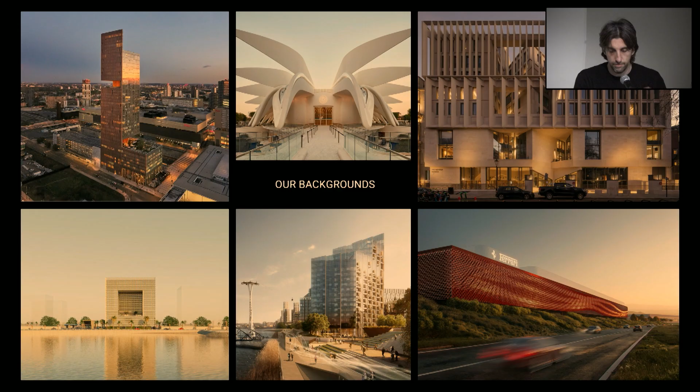We come from different professional paths. Myself, I started my career as an engineer, then transitioned into architecture after moving to London. Since then I've been working as an architect, first at SOM and then at A-Fact. On the other side, Andrea and Giovanni started as architects, moved into engineering for a while, and then went back to architecture.

So we have a diverse background, and this gave us the opportunity to be exposed to projects in different ways, from the engineering perspective, the sustainability perspective, but also from the architectural perspective. So we like to work in a hybrid space in between the disciplines.

Our philosophy is based on this book, Factfulness. We came together after reading this with a strong idea of bringing our past together into one approach. It's a very famous book, but it explores common misconceptions about global trends and uses data-driven insight to challenge pessimistic views about the world. At the same time, it offers practical ways to understand, and by using a fact-based perspective on progress, inequality, and human future, gives possible solutions.

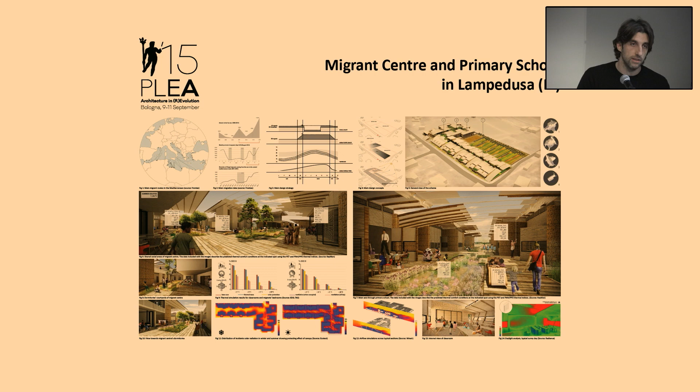Our first A-Fact project was born out of our dissertation. In 2015, we focused on addressing a stringent challenge of our day: migration, and how to deal with migrants coming from sub-Saharan Africa into Europe, into the south of Europe. This was the first project where we gave a solution by cross-referencing data on the seasonality of migration and climate data, putting them together to develop a hybrid architectural solution that could work as a migrant center during some periods and as a school during others.

So it was sustainable in the way it was interpreting and understanding the climate.

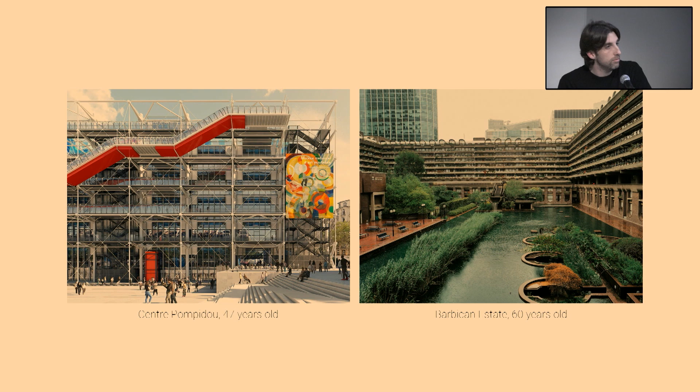But also, when we look at sustainability in a different way, there are some buildings that maybe don't reflect directly with the climate, but they manage to engage a complex dialogue deeply rooted in the reality of their context. We believe that architecture is rarely impactful when it's just a dogmatic idea, but it always emerges from a dynamic system of tension between practical needs, context, history, material, and human aspiration.

We also think that reality should not be seen as a limitation, but rather as a rich source of inspiration. And architecture, like we see on the right, should not impose itself, but should acknowledge its vulnerability. So that vulnerability could be an added value. You'll see in the next project that I'll show that we're trying also to get to that point.

So after understanding the building and seeing what the building can tell us, what the surrounding can tell back - this presentation focuses mainly on some aspects that I found key when translating the environmental design methodology into the profession, because the profession is not affected only by the environment, but by many other forces.

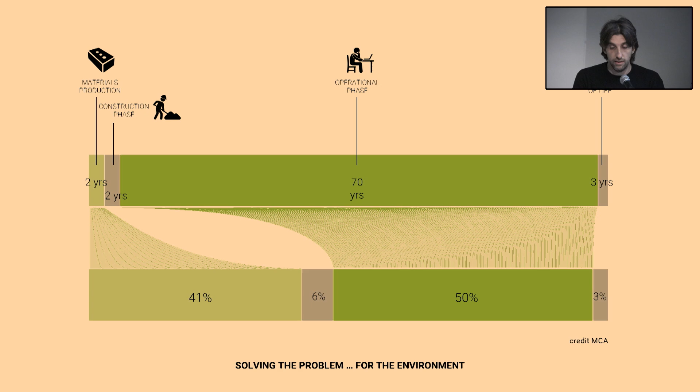But also we need to solve a problem for the environment, and we are very aware that just the construction phase of the building, the first 2 years, if we think about a 100-year building life, can affect 41% of the emission of that building. And the next 70 years, the operational carbon is going to take 50% of that share. So these things are starting to be relevant today, and I think we need to acknowledge all aspects of it.

And finally, solving the problem for the future means looking not only at what's going on today, but what would be the challenge of tomorrow. Things like pollution will be solved through electrification of the different systems, but biodiversity, water, waste and energy will be the most pressing challenges.

So our building should possess all those qualities together, and mimicking a TV program, we call it the A factor - which means the ability of the building to possess and harmonize all these aspects together according to the different cases.

After this introduction, I'm going to show three projects that we have been developing recently, which will soon be on site. These projects talk about three challenges for the architect today: building light, building community, and building ecosystems, which we think are very pressing challenges for contemporary architecture.

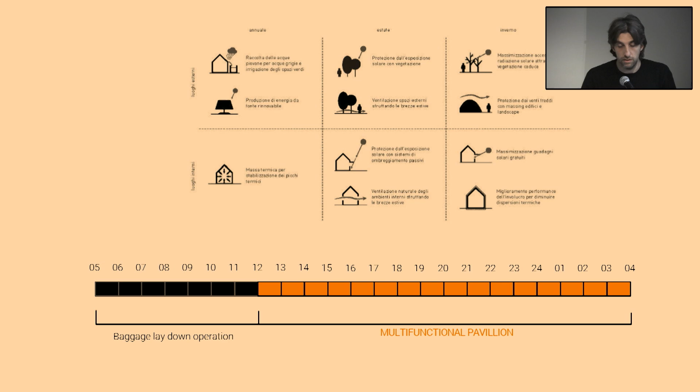Also thinking about Palermo's climate, which is very mild and Mediterranean, with relatively mild temperatures in summer and very strong solar radiation, our first idea was to use the building all the time. So we proposed to the client to use it as a multifunctional space for events that could actually bring revenue for them, and at the same time to build something that was really light, a roof that could protect from the sun.

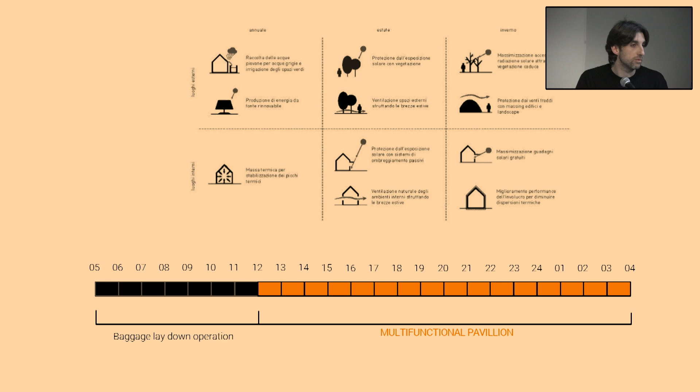Starting from the original building, which still functions, and the extension as a temporary structure in front of it, we started from the prescribed dimension.

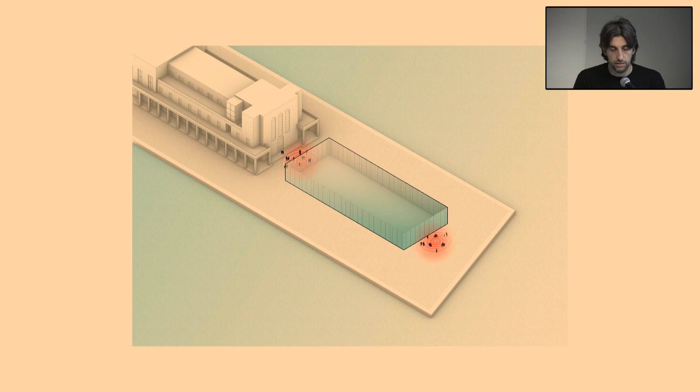We built the notional volume that was needed by the Port Authority, and then we created a roof that was based also on the movement of passengers entering the building and then going out from the site.

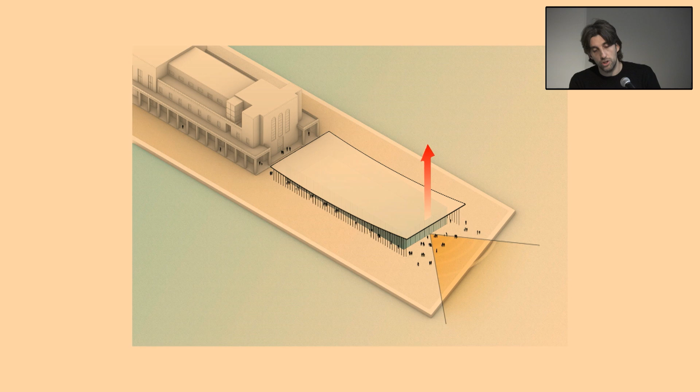But then we thought that the building could have an interesting way of welcoming the cruisers coming to Palermo, since this was the first thing they saw once they arrived. So our challenge was to create something a little bit more extraordinary out of a really standardized element.

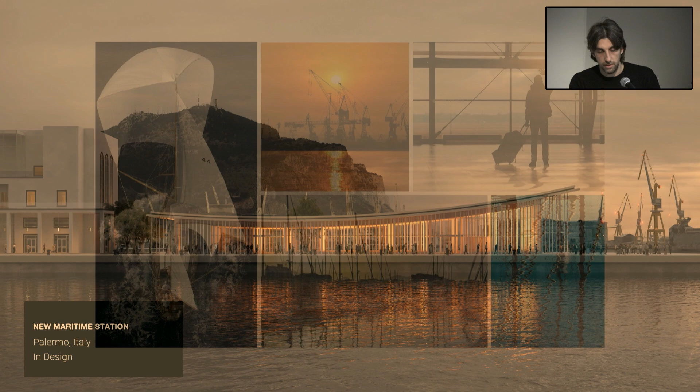The building also had to be very much inspired by the surrounding port, with its cranes, the movement of the wind, the reflection of the water. So we took all these elements, brought together this data, and ended up with this pavilion that's all about giving value to a temporary structure - very simple pieces put together, but also embracing the nature of the building as a temporary, ephemeral structure in so many ways, something that could be used by the community.

We analyzed the overhang to find the optimum balance between the economic efficiency of the cantilever and the solar radiation values dropping onto our glazed surface. We wanted the building to be glazed.

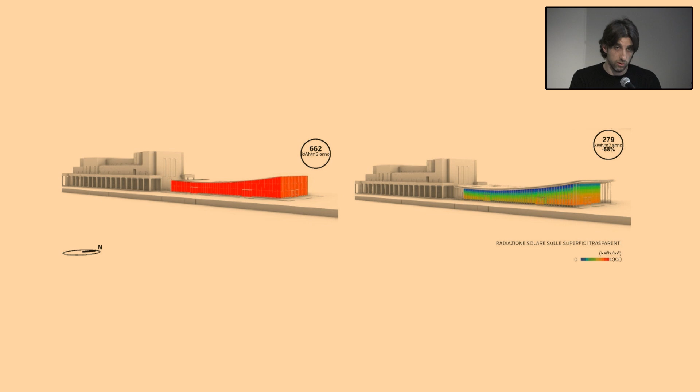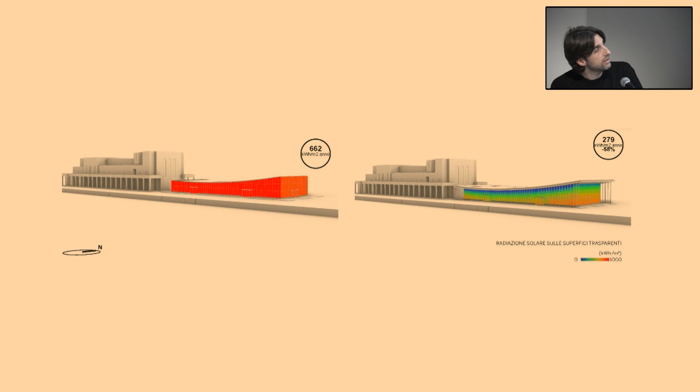The client was pretty much forcing that as well. But we also wanted to create a building that, with the structure, the architecture, and the form, could act as both an environmental design, a structural device, and an architectural device.

So we wrapped the building up with a series of very thin columns, which worked also as a shading device on the east and west sides, and a very deep roof acting to protect the space below. With natural ventilation, the building could be free running.

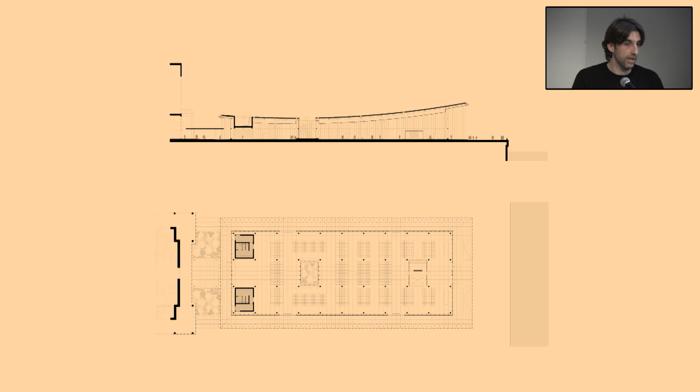However, because it was a technical space, we had to provide mechanical ventilation. The plan of the building also resembles that of a temple, with a simple, modular, repetitive structure.

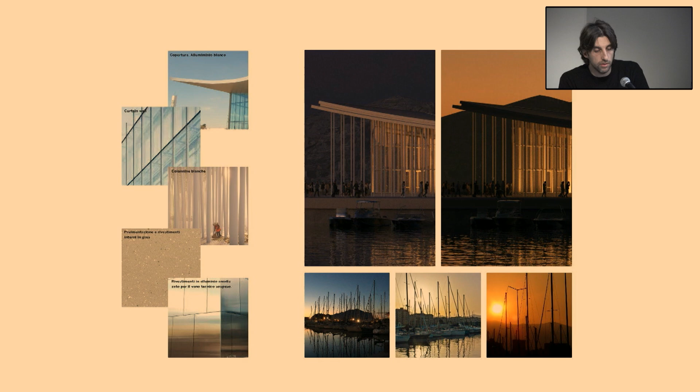We worked a lot with materiality to use material that could reflect and emulate the environment of the harbor, so the building could change and reflect what was going on around it.

This is another image we created recently that brings together this idea of the frame of the background, this object as an abstract presence in the port, but also everything very, I would say, temporary - this idea of the ephemeral emerged a lot in the project and became also a kind of strength of it.

All the elements were easily assembled, and the structure uses just repetitive elements. The idea was that we were designing for DFMA and DFD - design for assembly and construction, and then to dismantle the building and probably build it somewhere else. We did some studies to calculate and reduce the amount of carbon and pieces needed to build this structure.

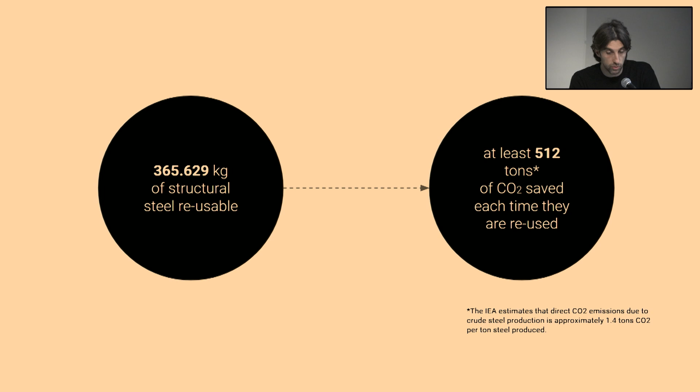With empirical numbers, we came to the figure of 512 tons of CO2 needed to produce this steel, which could be saved every time the building is reused.

The second topic is a project resulting from a competition held a few months ago for the largest social housing project in Italy since the 90s. The complex comprises 7 plots and a total of about 220 units, including student accommodation, elderly accommodation, and families.

It's located in Bologna, which is a quite interesting city, very active, with strong community components. In Italy, social housing often carries a stigma, and there are only a few truly successful examples that challenge this perception.

Italy has a strong heritage of historical centers and active communities. We knew this was the first such project in 30 years, so our challenge was to combine economy and functionality in the social housing, since the budget is very low—about 1,500 euros per square meter—while ensuring variety and fostering a vibrant, thriving community.

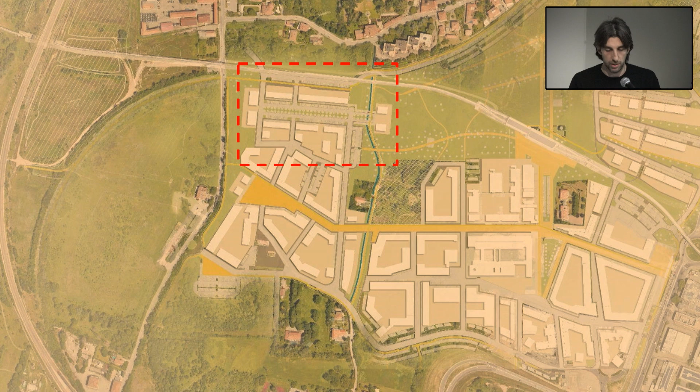The brief required us not to change the insula layout, to avoid delays in approval and construction. But at the same time, it was asking for a new, sustainable, and happy community that could be a symbol for future development in Bologna.

This is one image of the site. A few of those plots are already built by private investors. We had to act basically in a place where there was no real context—it existed only on paper.

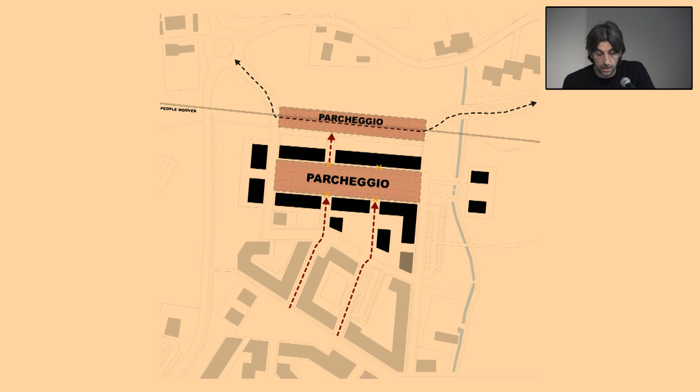So we started with the original brief given to us, which basically proposed a quite monotonous sequence of buildings of the same height surrounding a parking area—a very modernist approach that prioritizes standards more than quality or human scale.

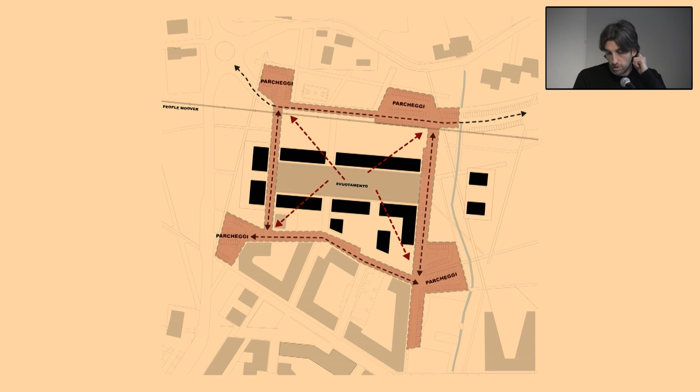Our first intervention, which was done by many others in the competition too, was to free up the central space and create what we call an urban courtyard, a cortile urbano, conceived as a green area designed to be the heart of our community.

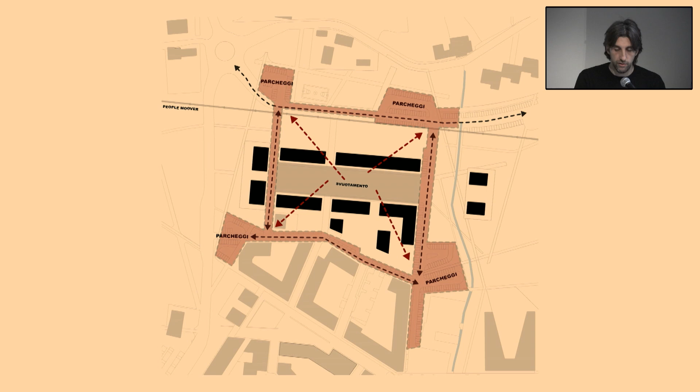We also thought about moving the parking to street level in a strategic way, to allow us to patrol and oversee some areas that were not really active.

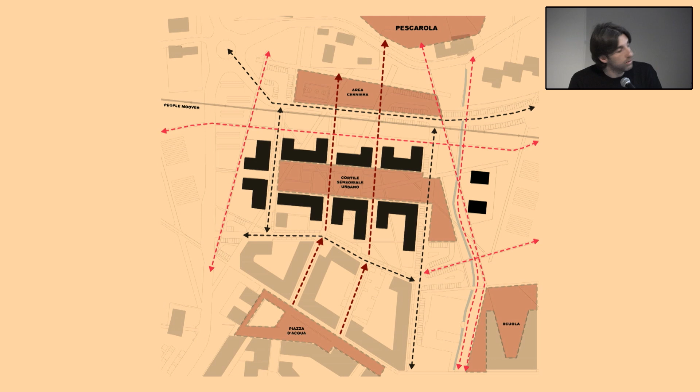The second step was to change the shape of the building to reconnect the master plan with the broader city, restoring historical pathways such as the one along the river, which became a cycle route connecting this part to the historical city center in 15 minutes.

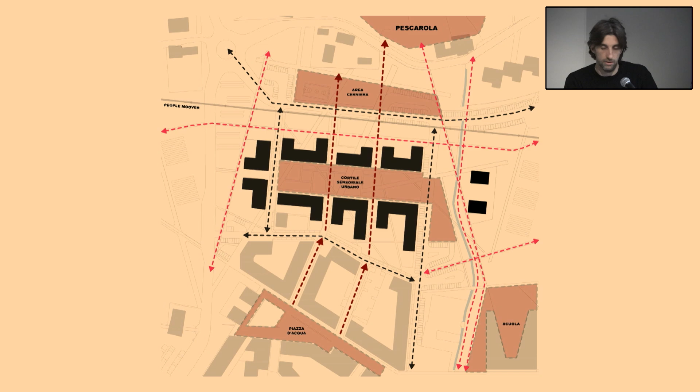We also adjusted the prescribed building volumes and strengthened those connections. But the move that was really successful and appreciated by the jury was how we redistributed the density—by playing with C and L shapes, we introduced height variation around this central space.

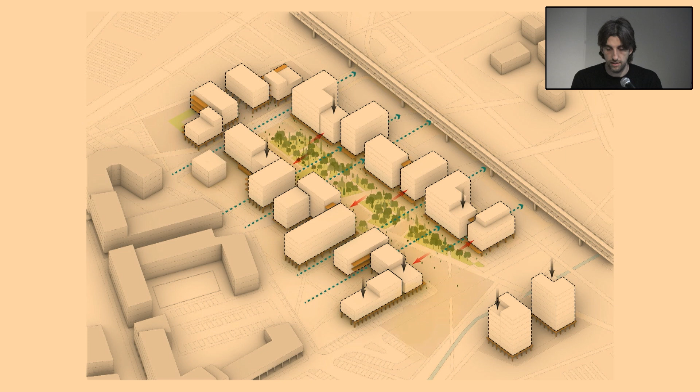Finally, we introduced further fragmentation of the volume, transforming the shared spaces and connections between buildings into hubs for social interaction.

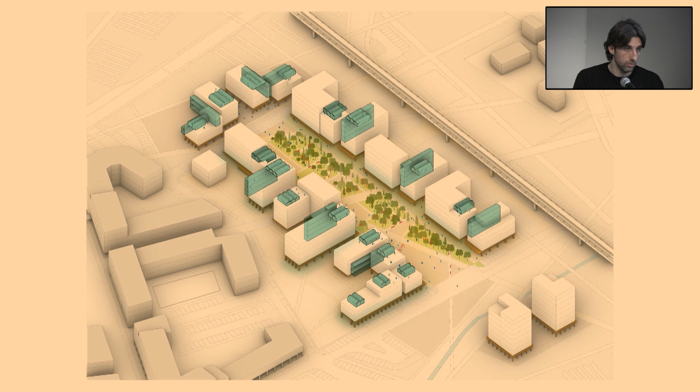Residential blocks were equipped with rooftops and greenhouses to support urban agriculture, which is a strong activity present in Bologna.

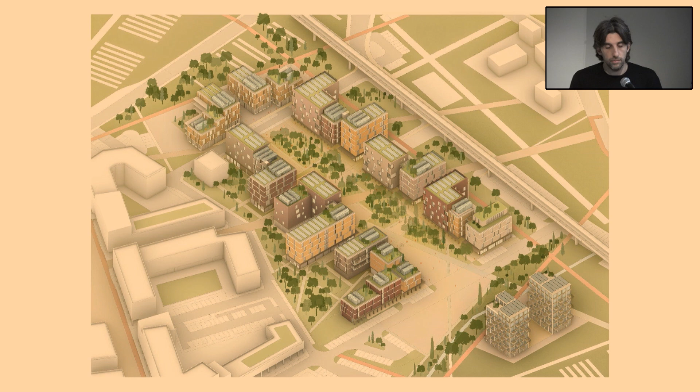We took that a little to the extreme by using color to reflect the rich variety of Bologna's historical center, while being careful to match the hues found in the city. I think this gives a sense of belonging for each inhabitant of each building, and a sense of identity for the whole development.

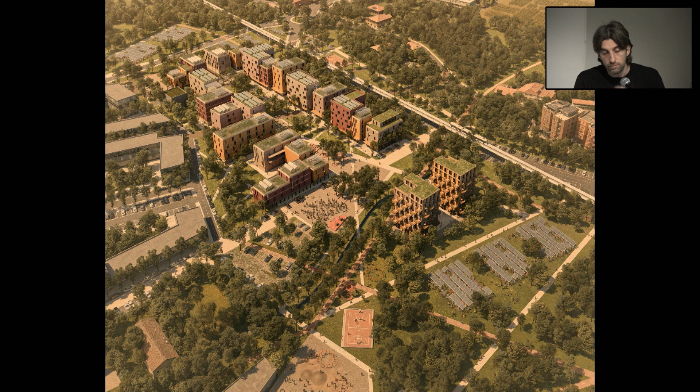So the final result was this: the central space was given over to courtyard and landscape, and one very important focus was on how the buildings touched the ground, because this was the part where the actual community was going to be created.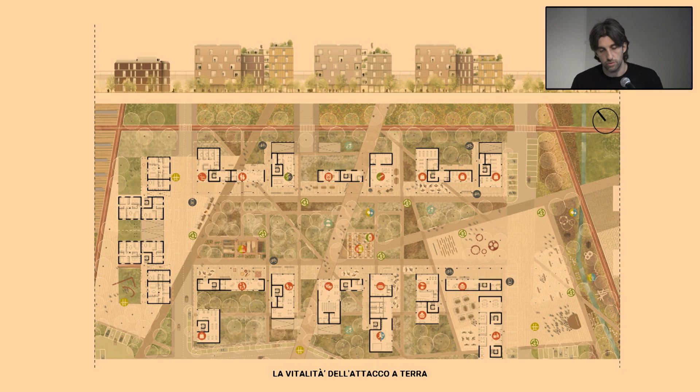So we plan and design, and now we are working with the council to understand which activities are going to populate this ground floor. But part of the brief was to envision some of them, so we basically laid out the whole ground floor. The idea was to prioritize activation and also create this space of connection and relationship between the different buildings.

In terms of moving from the urban scale to the building scale, another important aspect was this transition of scale. Even the corridor space, as you can see here in some of the buildings, was used as a space where activities could be carried out, especially greenhouse and growing herbs, which is pretty common in Italy.

The design completely changed the perspective with which the original brief was done. It's a proposal that plays a lot on variation in colors, in activities, in size of the building. To optimize functionality, we chose not to include balconies, because this was related both to the idea of bringing people together on a common rooftop or on the ground floor, but also related to the very strict budget that we had. We know balconies are quite expensive when it comes to that.

We also observed that most of the time balconies are misused as storage when they are not generous enough. So we preferred instead to dedicate storage space in the basement and keep the building free from balconies. This was also a choice that was much appreciated by the jury.

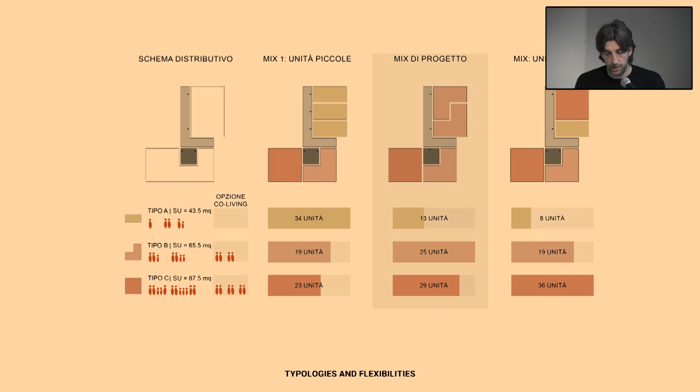Each unit presented was based on a modular system, a system that supported a timber structure. We are still challenging that because timber brings a 30% increase in cost. So we are still deciding where we want to spend most of our money - on improving other aspects of the building, or on going for a timber structure.

The idea was that all the apartments were laid out to have cross ventilation, to reduce overheating and minimize the need for mechanical ventilation. As you can see here, all the apartments have 2 sides, and the corridor allowed access to the block on the right.

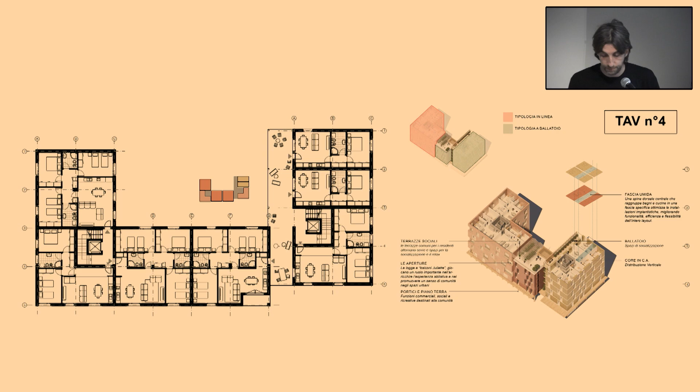Again, the project emphasized off-site construction to reduce on-site construction time and streamline building processes. The idea of design for manufacturing and assembly principles was brought as far as possible, using a modular facade system, precast, prefab, but also prefab structure and pods for toilet and WC, and the stairs of the core.

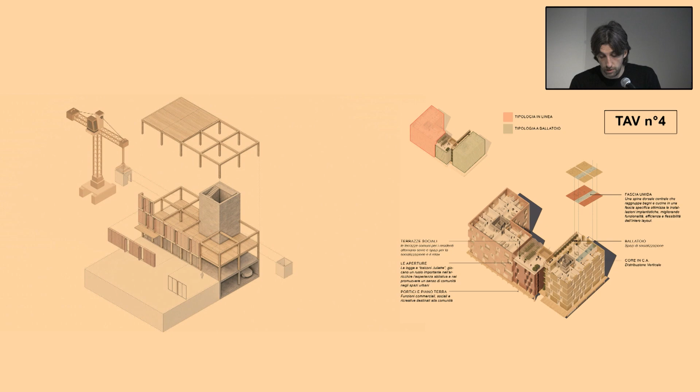So this is the final image that shows this active ground floor, the timber structure that becomes also a kind of feature of the development, and this idea of dynamism and variation that we want to recreate in this new eco-district.

So the third project is also the result of a competition that we won 6 months ago. We were selected among different proposals from international practices such as Snohetta, Diller Scofidio and Renfro, Sou Fujimoto, Ishigami and Larsen, Mario Cucinella, and Boeri.

I think the successful part of this was that we were really playing almost another match - we were trying to build an ecosystem rather than building a building.

The project, as I said previously, is located in Montenegro, in Podgorica. It comprises three cultural districts with 3 distinct museum buildings, a botanical garden, a public riverfront promenade, and a second phase focused on additional cultural buildings. So it's both the scale of the master plan and the scale of the building.

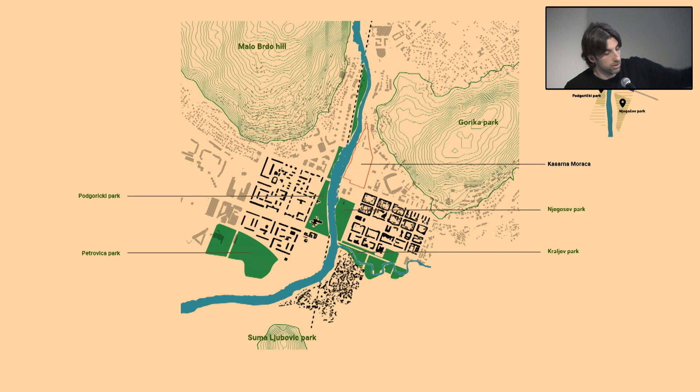sequence of three historical layers. The Stara Varos, which is the one on the bottom, which is the old city. The Nova Varos, which is the real center of the city, characterized by the perimeter block and the courtyard block. And then the Novigrad, which is the new city that was created on the west side during the Soviet period.

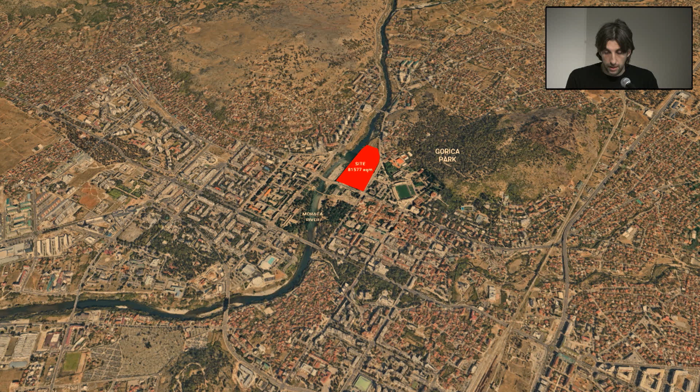The site we had to deal with was kind of in between this city center and the natural landscape surrounding the area. As you can see here, the Moraca River serves almost as a natural but also physical, in a way strong, access to the city. And the hills and the valleys, like the Gorica Hill, are basically going down toward the river.

The site was strategically located along the river and was part of, as you can see here, a vital almost green infrastructure. And it almost didn't call for a building itself, right? But to be part of the natural landscape.

So for us, it was evident that to succeed in this competition, we have to create a connection and balance. On one side, the preservation of the already existing ecosystem, and trying to organize the site in a clever way so that didn't interact much with that.

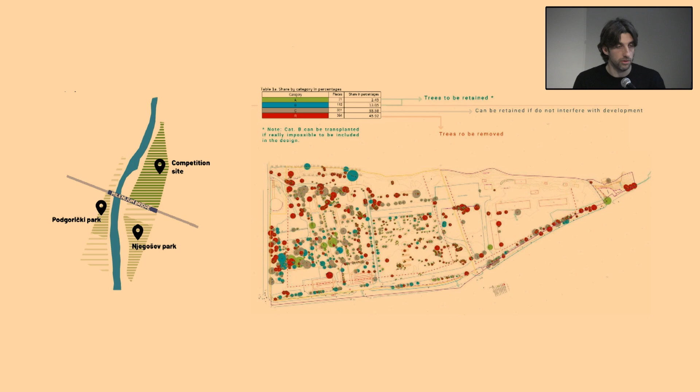So our first approach was to collect data on all the trees that were on the site. There was a previous study that was given as a brief, but with our landscape design we went a step farther, being able to categorize the different trees according to the actual importance that they have on the site, which was key to generate our proposal.

So basically the three questions we asked ourselves were: how do we connect the city and the river? How do we connect the green system? And how do we create a public attractor? All ingredients that need to converge to create a new anchor in the city.

So I'll go through - I managed to find all the sketches that we had for the competition, but I think they are very good to explain what was the process behind it.

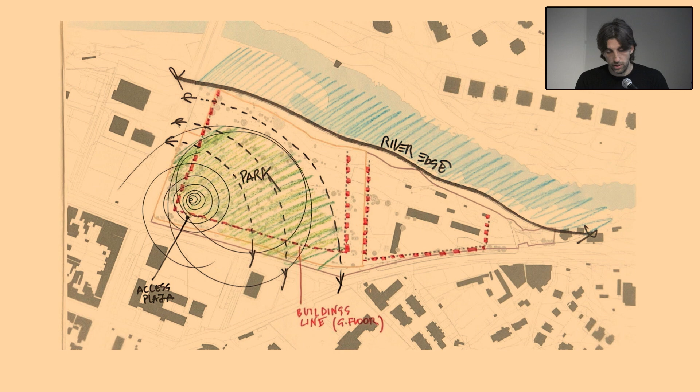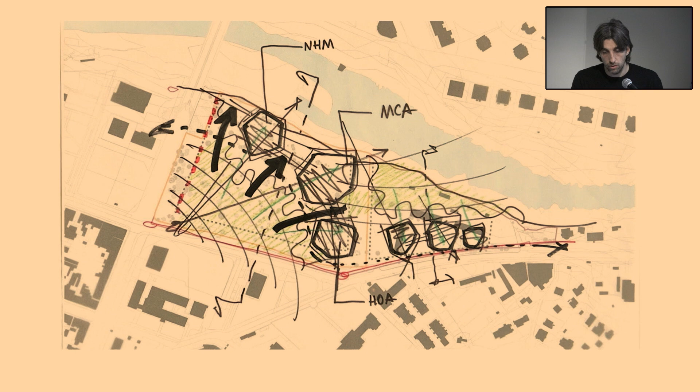There was a central area park that was the right place to connect the site with the city. At the same time, it was the place where all the most important trees were located, so we started from there as a point to organize our master plan. And of course, the idea was to create this continuous platform that could connect the whole site together. So the building had to be placed in a clever way to let the nature go through them, not to create a barrier, but to be in a way hidden within this landscape.

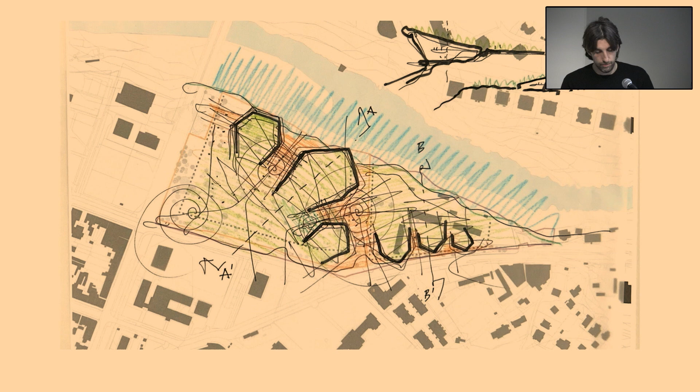So this kind of evolved in a series of drawings from which emerged an idea of creating a side from the river that was pretty much inspired by what was happening around. So the riverside was more mineral because of the erosion of the water, and the parkland from the city was kind of trying to contrast that.

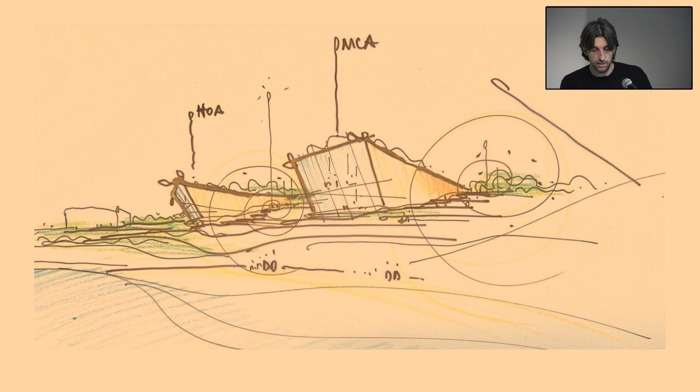And then again, this system becomes more and more clear until we finally place buildings that were generated by the land itself. And then on the other side, this building could kind of become stronger, and their presence could be more alive and real and strong. So they have this monumentality, which is pretty much needed for a cultural building.

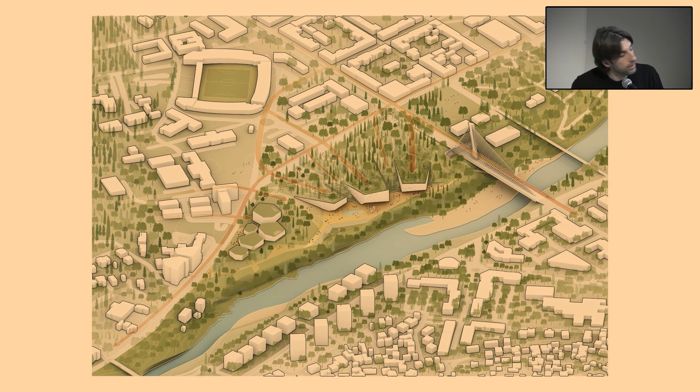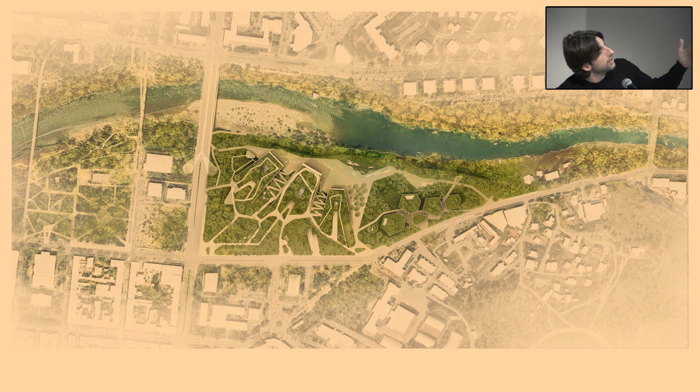This diagram shows the overall site development, with the building that has tried to find that point as a generator, but then adapts to the context. And plan-wise, here we can see these two forces converging together, and actually all the green side on the south kind of merging with the more eroded and mineral side on the north, which then was transformed into a promenade on the riverfront.

The plans of the building were conceived in a similar way, and what was interesting about them was that they all shared the same idea of transitioning from the green park to the river walk. This was curated as an experience for the lobby of the museum. Looking at the building from the park, you could see almost some hills, and you could transition into that. We used this slogan, the park is the museum and the museum is the park, because it was part of the brief to create also an outdoor active space where arts could be exposed.

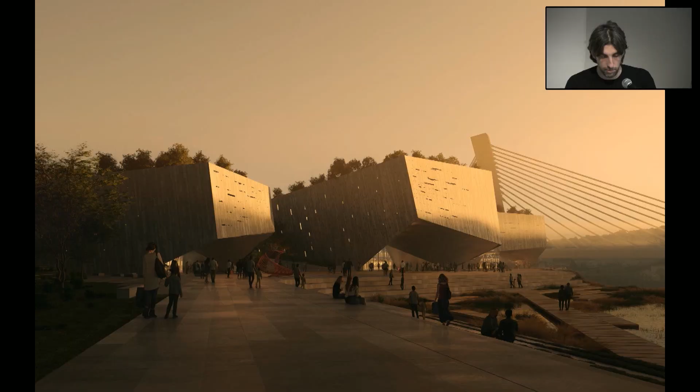The entrance, almost in a mysterious way, becomes something hidden within this landscape. But looking from the other side, the more mineral side, you could see a more active promenade where the bar and shops of the museum were located. So it has this kind of dual aspect: on one side the river, on the other side the park.

Going back to that study of the trees, the landscape design was featuring a blue and green infrastructure. We did a thorough analysis to integrate natural features to enhance the park biodiversity, and we counted all the trees. We preserved 290 mature trees, and we planted in our proposal 532 new trees, plus bushes, shrubs, and other species.

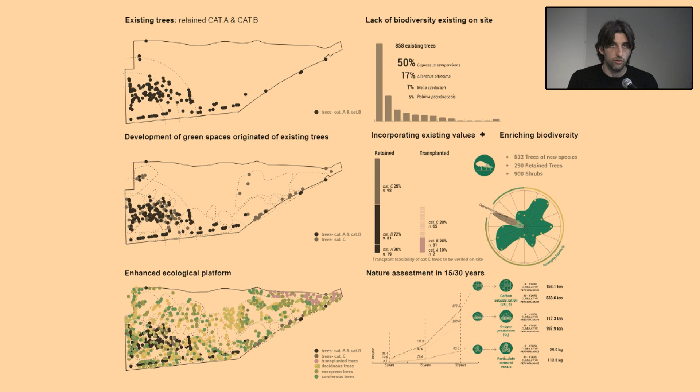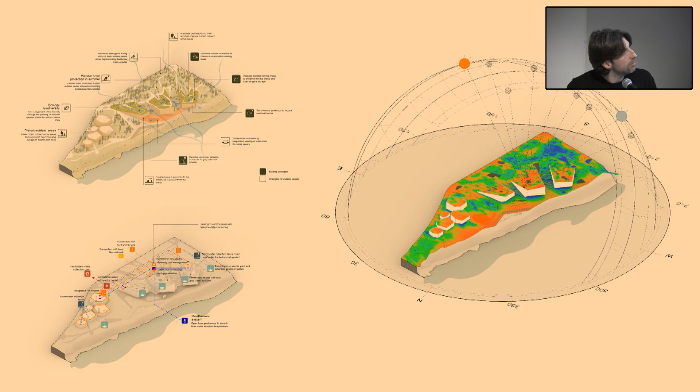We understood that since the building was less important and the park was more important, the comfort had to be designed also outdoors. The idea was to achieve that variation in terms of condition and comfort level, but also spots with different atmospheres. Naturally, the part that becomes more shaded was the entrance to the site, and this was also affecting the kind of activities developed in that part. Creating this variety through trees was the analytical work we carried out to achieve a comfortable park.

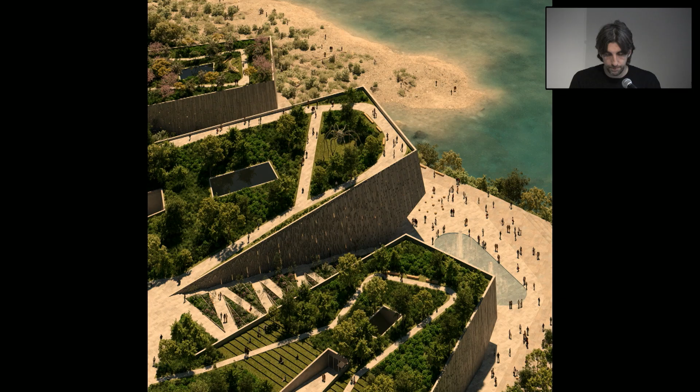This is a view from the top. You can see how the buildings start emerging from the ground, and how the transition between the level of the park and the level of the river was curated. This was also coming from a source of inspiration from the oldest part of the city. The vernacular approach to the Morača River in the Ottoman city was very playful, and it reminds me of what Carlo Scarpa was doing, for example, in Venice, playing with different levels.

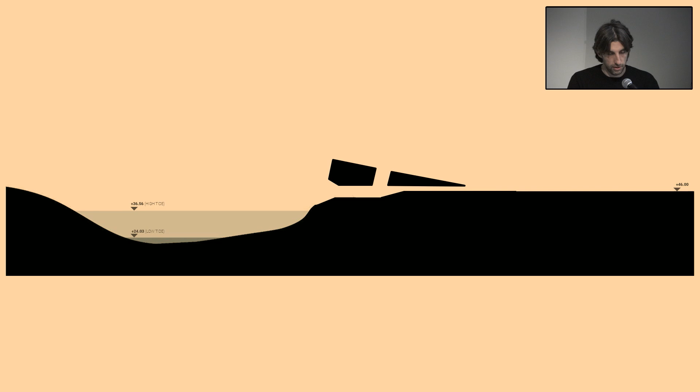We wanted to make that idea part of the experience the visitor would enjoy when they arrive to the site. The notional section was really simple, something like this, and you can see the level of the river that can be pretty dangerous during different seasons, but we thought that was part of the experience, to experience the river in different moments. Again, the public non-ticketed area was transitioning from the park level going down into the river walk level.

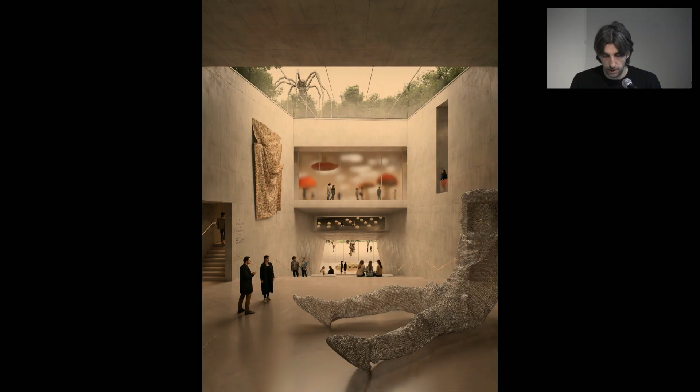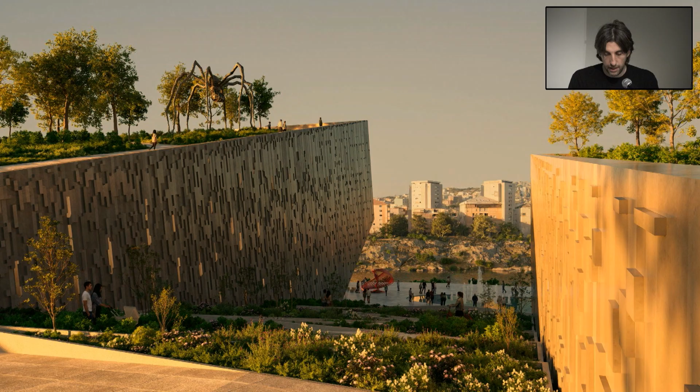We also wanted to maintain this experience of being outdoors. The museum lobby was designed to connect the two different levels, but also always maintaining this strong connection with the outdoors. With the skylight on top, you could almost see the river from the entrance of the building from the park. Bringing back that idea of the vernacular way to approach the riverside, we also emphasized this experience of going through the building as something really playful and strong in the proposal.

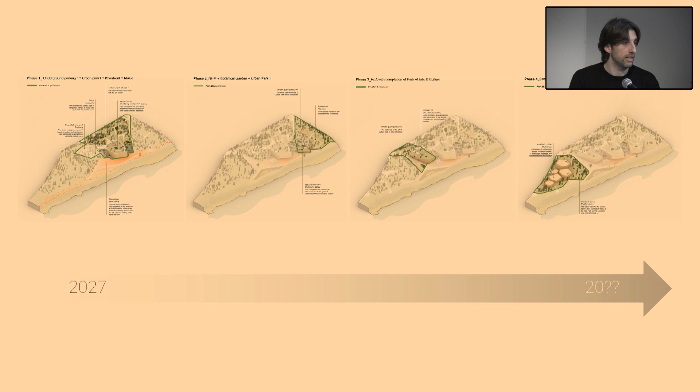In terms of phasing, the project had this aspect that was really appreciated by the jury, because economic sustainability was a strong aspect of it. Our proposal was conceived in a way that it could be phased and still be valid. So the first phase was for the biggest building, the Museum of Contemporary Art, working alone, and then we could have the second phase, which was just another building, and then the third phase, having also a strategy on the rest of the infrastructure.

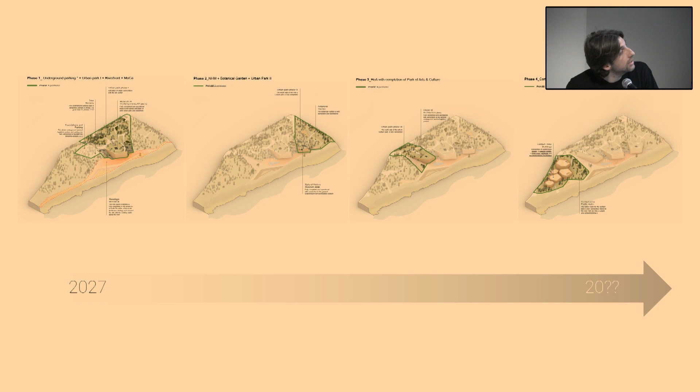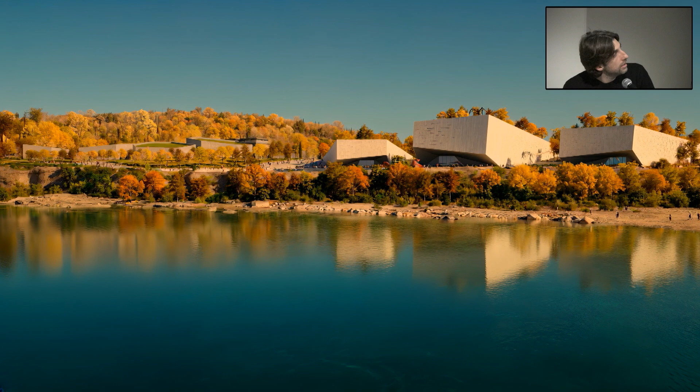Finally, the first phase is supposed to start in 2027, and then we don't know how much farther it's going to go. So finally, I have a small video that we presented in Montenegro last month to the municipality, and it shows a little bit of the environment and the atmosphere of the space.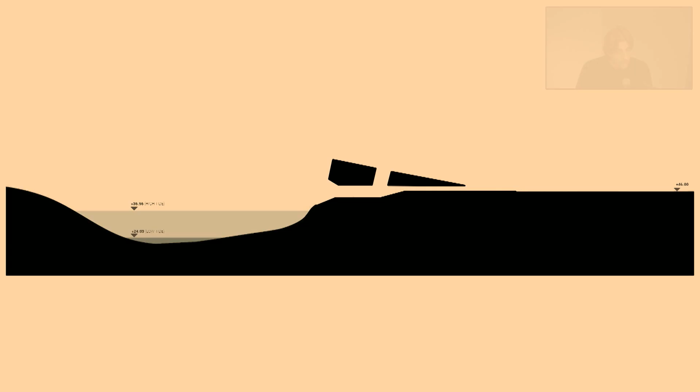So let me go back to this. Our building, we considered the flooding a lot. You can see here in this section the low tide and high tide. This high tide was almost 10 meters below our lower level, and it was given by the brief as the highest level ever registered in the history of Montenegro.

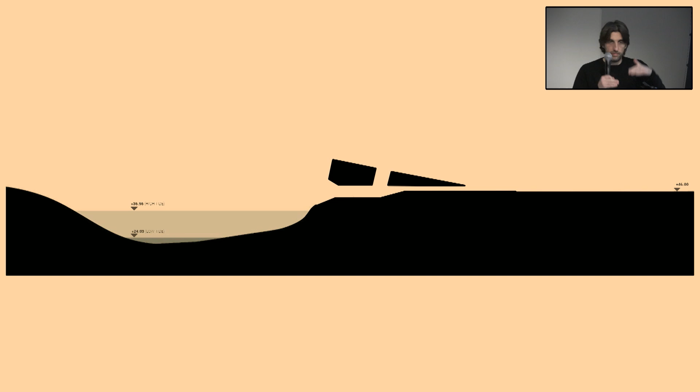So in a way we were clever in playing with that. What we did was create this kind of different approach, allowing for different parts of the landscape, not the building itself, to be flooded. So there are some parts that could be flooded, but we were pretty safe from that point of view because that was already set as a safe zone.

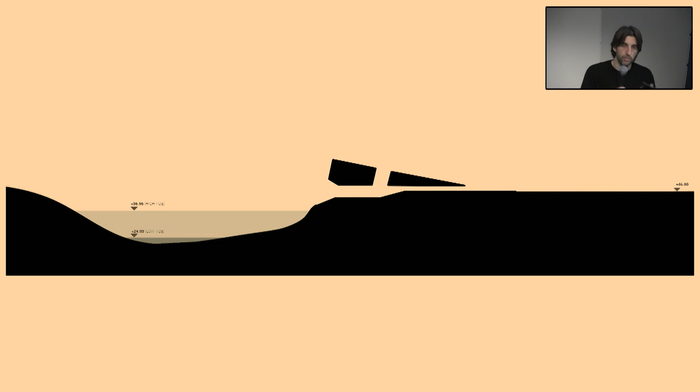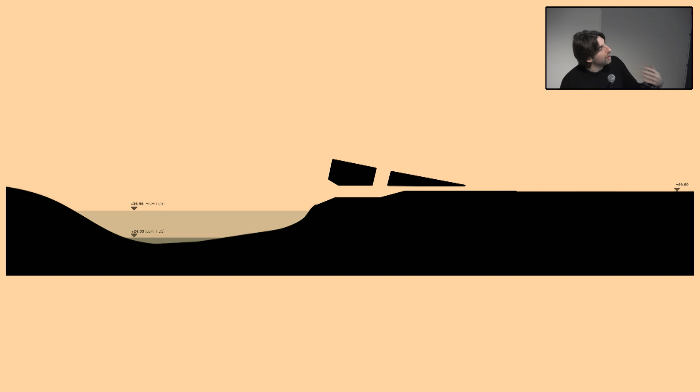And when I say the brief was really well done, it also covered this aspect in a more accurate way. So we didn't apply any particular strategy to prevent extremely exceptional flooding, but we wanted the building to be close to the river.

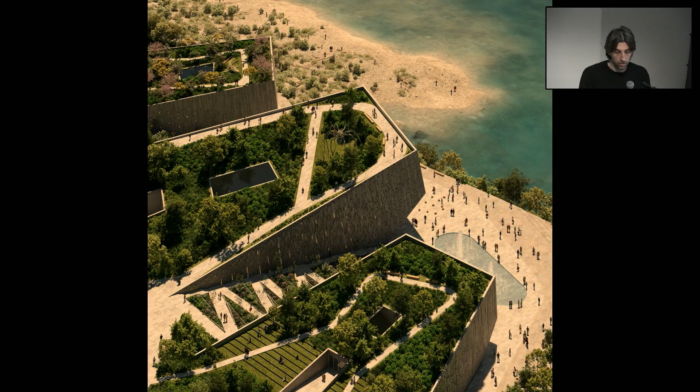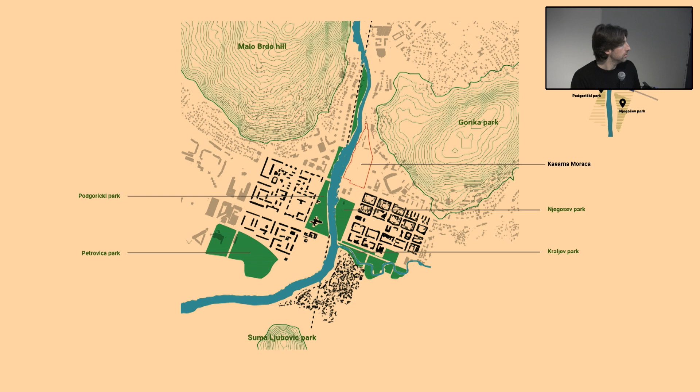I think that's where you're trying to see why we put the building so close. We think this idea you see in the city of Podgorica, where they took ownership of the river, was the vernacular approach. All the other approaches were kind of giving it their back. So I think this building was the new way of living with the river.

And yeah, from a technical point of view, we were kind of safe. I think that's the answer you want.

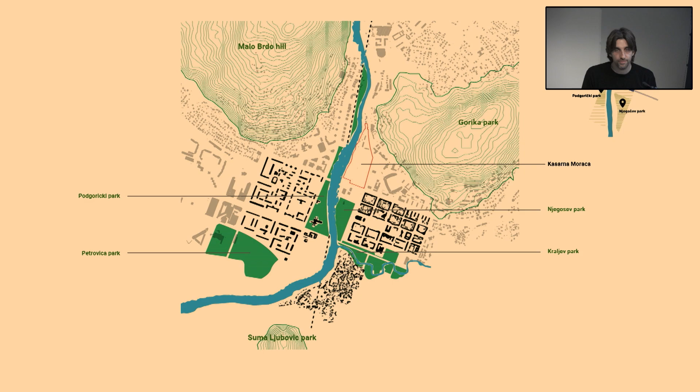Hi, thanks a lot for your presentation. Not only did I appreciate the overall vision, but also the right level of detail, with the rationale you gave for everything.

So maybe I'll ask a dumb question because I'm a designer, not an architect. It sounds like because of all this rationale you gave, there's a lot of research behind every project. So what have been the challenges running these big projects? Is all your work done internally in the studio, or are there skills you had to learn throughout, or did you have external suppliers to give more specific reports or insights to make this happen? Thank you.

Sure. In general, it's the big scale, and it's something we are more comfortable with than the small scale, because we have always been working on big projects, master plans, developments. So in a way it comes easier for us to do bigger projects than small ones.

But of course, for every project we do, we work with consultants. For example, Podgorica was a collaboration between us, Land, which is a big landscape office, Maffeis Engineering, and Charcoal Blue from London on the space design and space activation. So it's never a one-man show or a one-studio show.

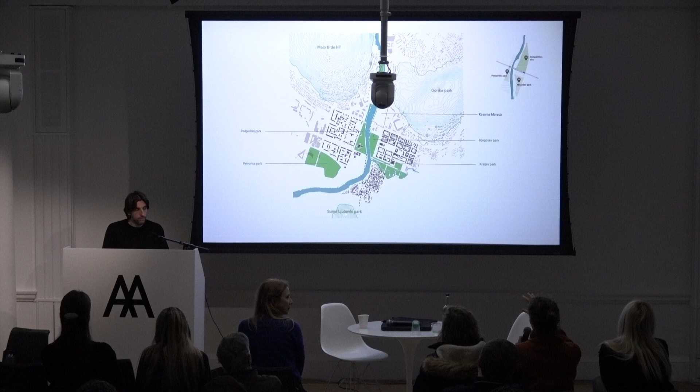It was really interesting, and it gives hope that more and more buildings go in that direction. I really like the factfulness you showed. I was curious how far you push on the environment part, and what is the pool you can draw from. I'm thinking of biomimicry, how they use nature's natural systems and ecosystems, and the local context in terms of habitat, to look at services for water, air filtering, etc. I was wondering how much you see it giving back as well, which is a step further than sustainability, isn't it?

I think we push in a way that we try to find that balance. There's a slide that's very useful for clients and for us, let me go back to it. This is where we always have our conversation with the client: where do you want to go? Oh, I want to create a sustainable building. Yes, but where do you really want to go? Do you want to go here or there? So this is one aspect.

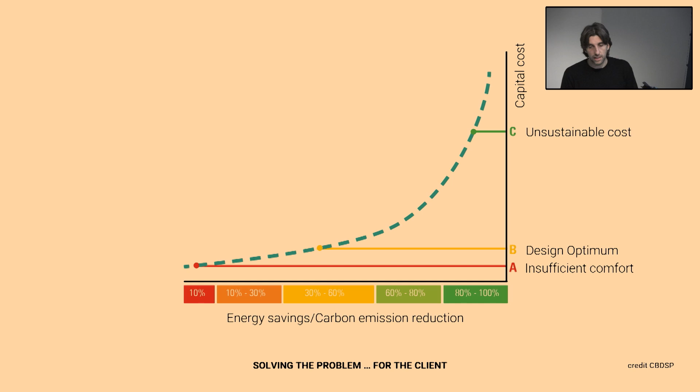Pushing means for us, even if we don't want to, we have this background we've learned here. I don't know if you've seen the previous SED projects from students—there's a strong, detailed understanding of climate and strategies to reduce carbon, etc. Something you'll never see in practice, because they spend 1.5 years on one project finding all the little details. When I did the project here, I never matched that level of detail in the real profession, because of course money, time, and so on. But regardless, there's this understanding of how things work, and even if you don't run 100 test simulations, there's overarching knowledge the project will absorb because it's there.

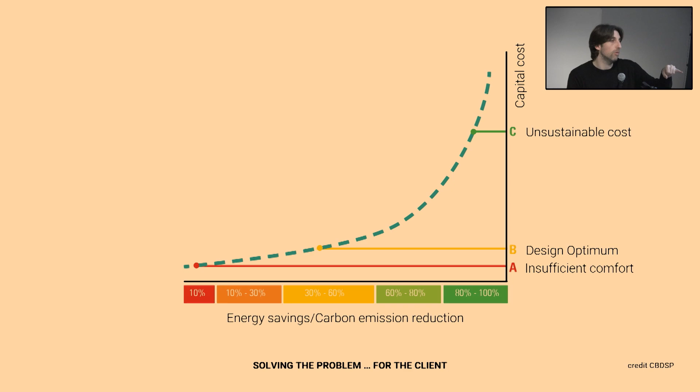I think factfulness, as we called it, is basically that—pushing as much as you can, but at a certain point this quadrant, this square, goes toward one direction or the other. As you can see in the projects, we want to say something, always trying to experiment a little, even if the project isn't really meant for that. We push one aspect or the other, but there could be buildability considerations more than natural energy saving or operational carbon. For example, in the cruise terminal building, operational carbon is one aspect, but at the same time we relied a lot on natural ventilation. We knew the roof was important for reducing solar radiation, so the extent to which we designed that roof was a balance between that and how much the roof costs if it's too deep.

So I think that's what factfulness means—focusing on all the aspects, but still balancing them.

Yeah, thanks. Okay. Anyone else with a question? Well, if not, we can conclude. Thank you so much, Pierluigi.

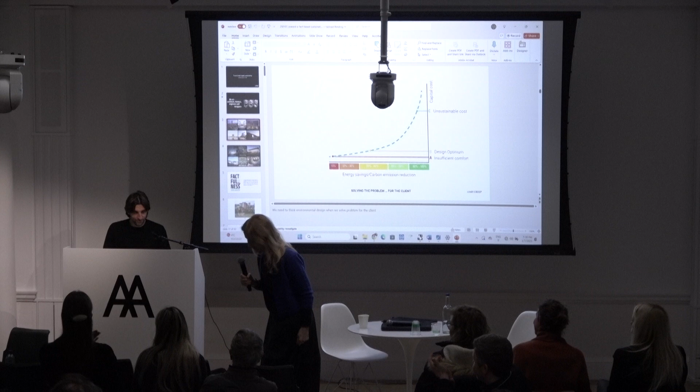I think it was a very interesting and inspiring lecture, and you portrayed very well your journey with your successes and challenges, and you were very sincere about how you achieved things. I didn't mention the failures as well—there were many on the way. But okay, so maybe in a few years you'll give another lecture. Thank you so much once again, and thank you all for staying.